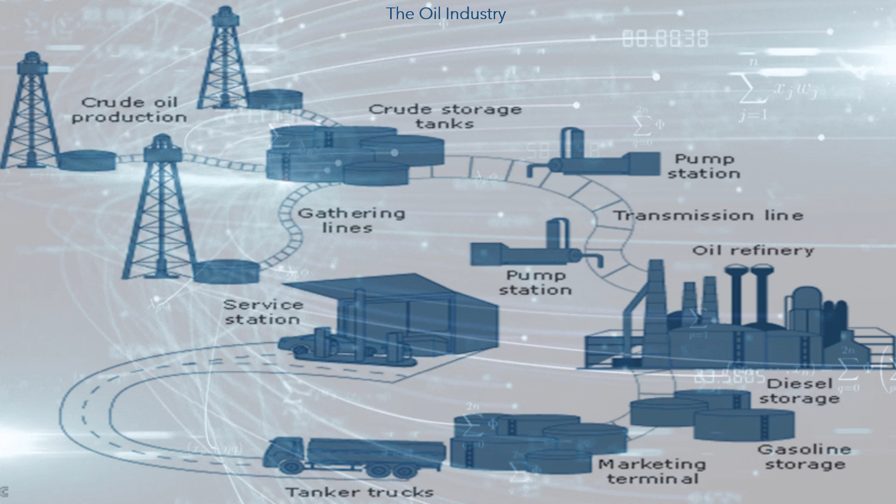Oil Supply Chain Optimization. The oil industry includes global processes of exploration, extraction, refining, transportation and marketing of petroleum products. The largest volume products in the industry are fuels, natural gas, fuel oil, and gasoline. However, petroleum is the raw material for many chemicals, including pharmaceuticals, solvents, fertilizers, pesticides and plastics.

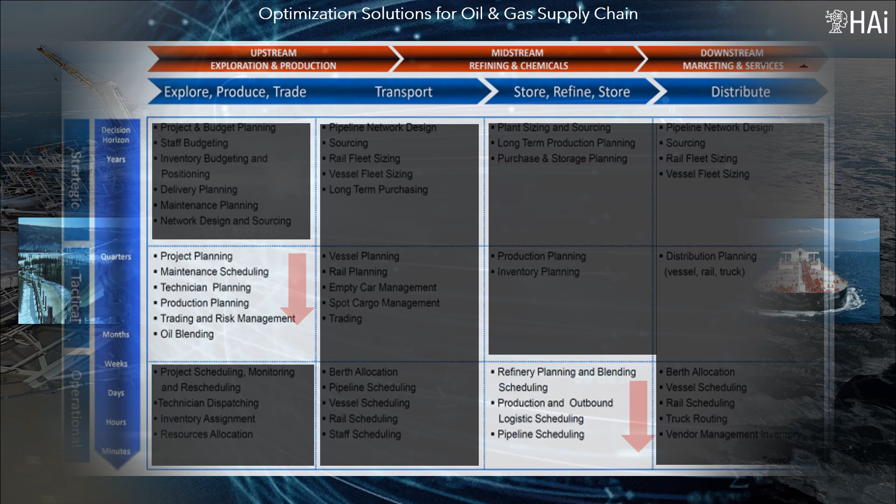The current computational power allows to model the supply chain in detail, considering individually all the systems that compose it. This allows to visualize all the existing bottlenecks that affect the maximization of economic gains. Optimization solutions in the transport chain of petroleum products can be classified by their hierarchy: strategic, tactical, and operational. Several of these applications will be discussed below.

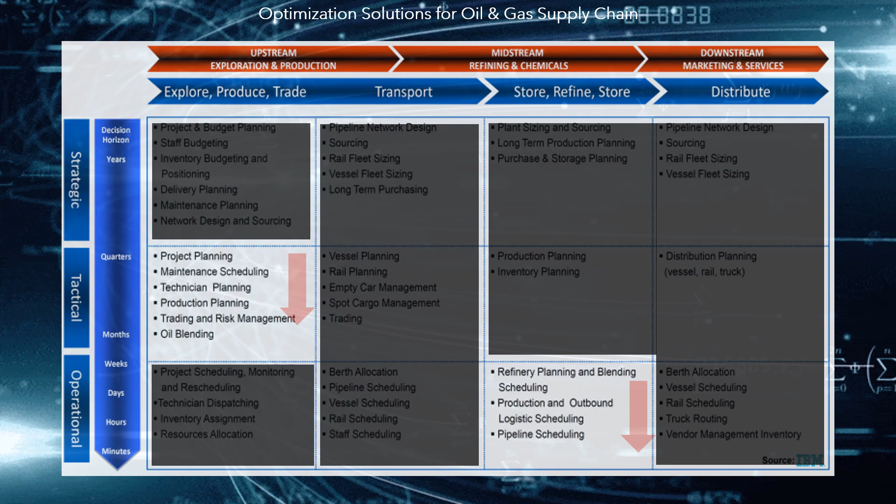The oil products mix for sale in the final markets. Optimizing the blend of crude oil and petroleum products is a multi-million-dollar application. It can be coupled to the production of oil fields, in such a way as to establish optimal plans for production, distribution, export and import. In addition, blending processes extend to petroleum products, for example, lubricants.

Oil transport, trading and blending optimization corresponds to a dynamic model that optimizes oil distribution between fields, refineries and ports, the oil mix for use in refineries, the mixture of oil for export in accordance with quality standards and established supply contracts, import of oil according to offers in the global spot oil market, and import/export of oil according to offers in the oil derivatives financial instruments.

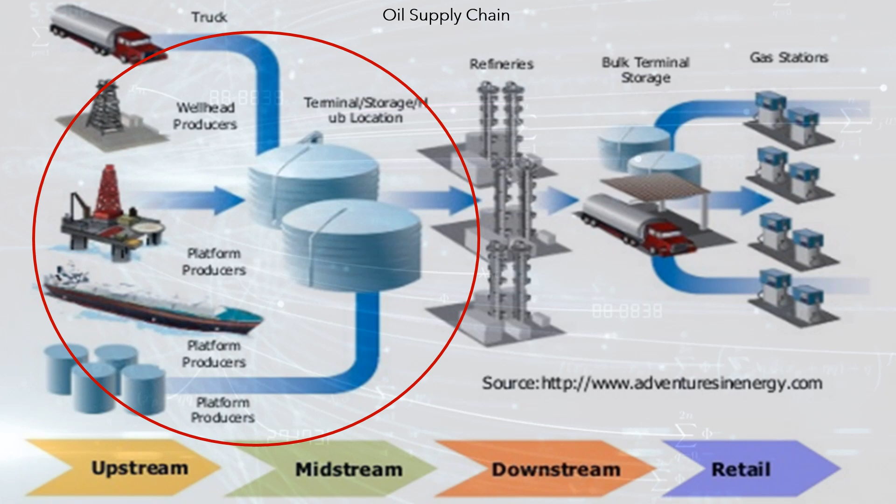The problem discussed in this section focuses on the distribution and blending of oil produced in the fields, to be distributed to the terminals of the oil facilities, where it will be delivered for use in refineries, own or in other markets. Refineries are modeled in an aggregate way, as an exogenous demand for oil. The blend model allows to plan transportation operations for multiple oil production systems, with a view to delivering crude oil blends to refineries and/or ports that are connected to the system. The system accepts any type of connectivity topology between facilities.

The supply of oil is given through fields producing different types of crude oil, with a predefined availability. This offer can be defined dynamically, considering the evolution of the oil-producing fields' operations plans. It is also possible to consider buying crude oil in the spot market. The demand for commercial crudes occurs in refineries and export ports. It is possible to buy crude oil in the spot market, in order to mix them and obtain new commercial oils. Purchases or sales of oil futures can also be considered, which must be respected.

The purpose of optimization is to determine the optimal operation of the system, in such a way as to maximize the utility produced, or to minimize the costs of satisfying a predefined demand. Integrally, the optimization process involves multiple crude oil blending processes, to make the optimal decisions related to the production, distribution, refining, consumption, and purchase and sale of oils over a planning horizon covering several periods.

Two alternatives of modeling may be considered: the direct formulation of the blending process that generates nonlinear equations for short-term planning, and an alternative formulation that maintains the model linear, in exchange for increasing its dimensionality over time, for long-term planning. The fundamental hypothesis of modeling is that all installations are connected to transfer tanks, in which the oil is received, mixed and dispatched to another terminal, or to an oil-producing or consuming facility.

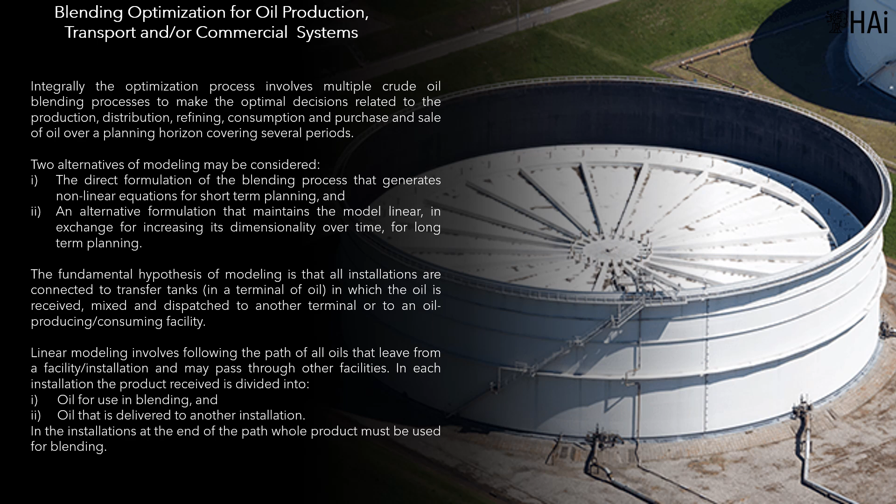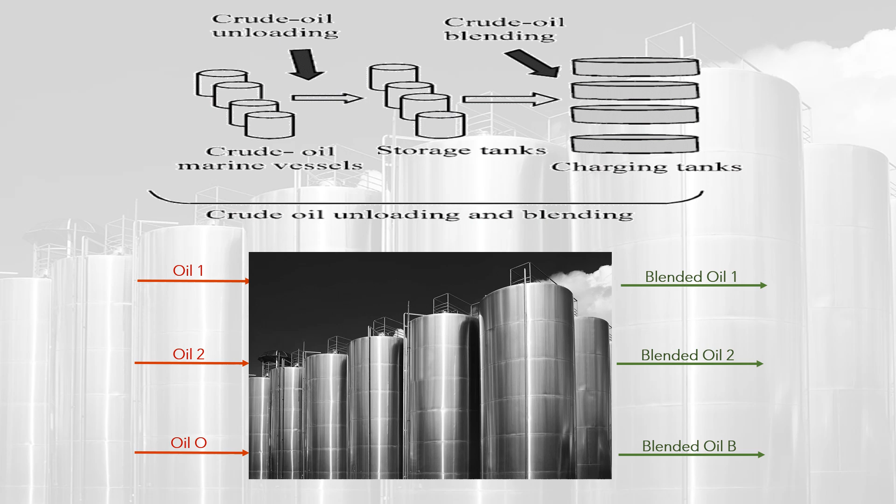Linear modeling involves following the path of all oils that leave from a facility and may pass through other facilities. In each installation, the product received is divided into oil for use in blending, and oil that is delivered to another installation. In the installations at the end of the path, the whole product must be used for blending, or for attending the demand. A terminal can be conceptualized as a machine that takes multiple oil crudes, mixes them, and produces multiple blended crudes. The diagram presents the flow of materials in the petroleum system.

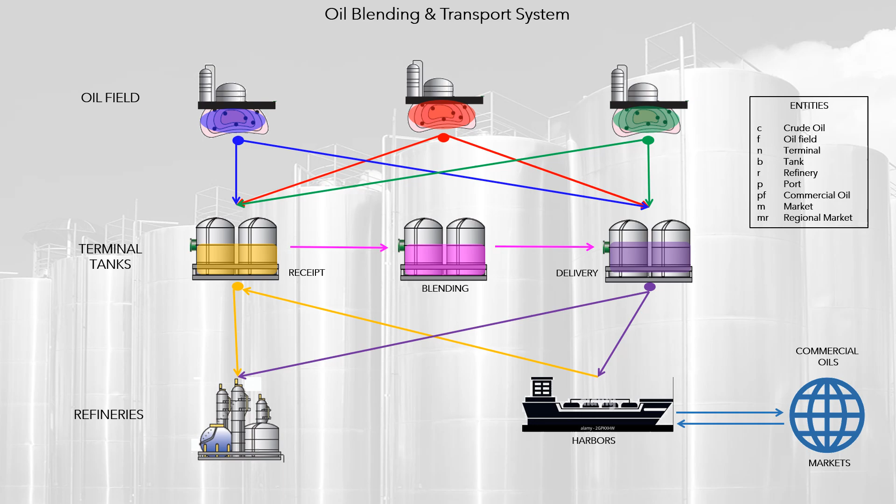The entities considered in the modeling are crude oil, oil field, oil terminal, tank, refinery, oil port, commercial oil, market, and regional market. Proof of concept: blending, transport, import, and export of crude oil. An example is the modeling of an integrated system of production, consumption, distribution, and purchase or sale of blending oil.

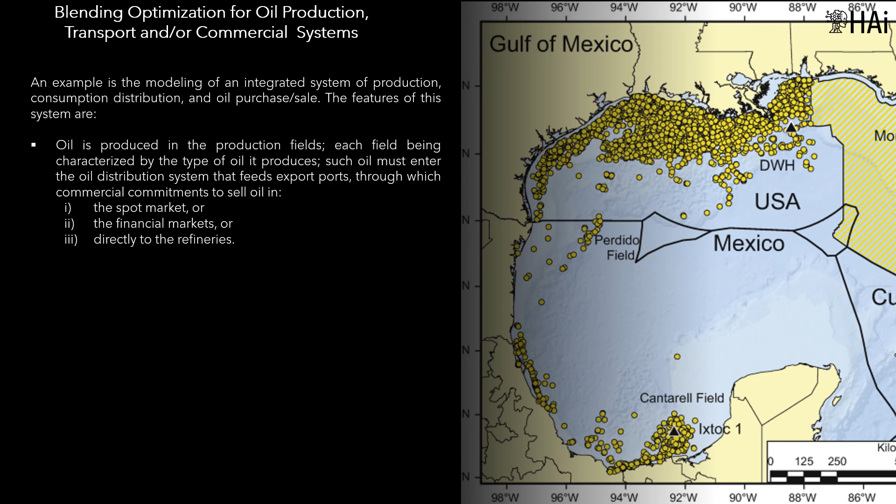The features of this system are: oil is produced in the production fields, each field being characterized by the type of oil it produces. Such oil must enter the oil distribution system that feeds export ports, through which commercial commitments to sell oil in the spot market, or the financial markets, or directly to the refineries.

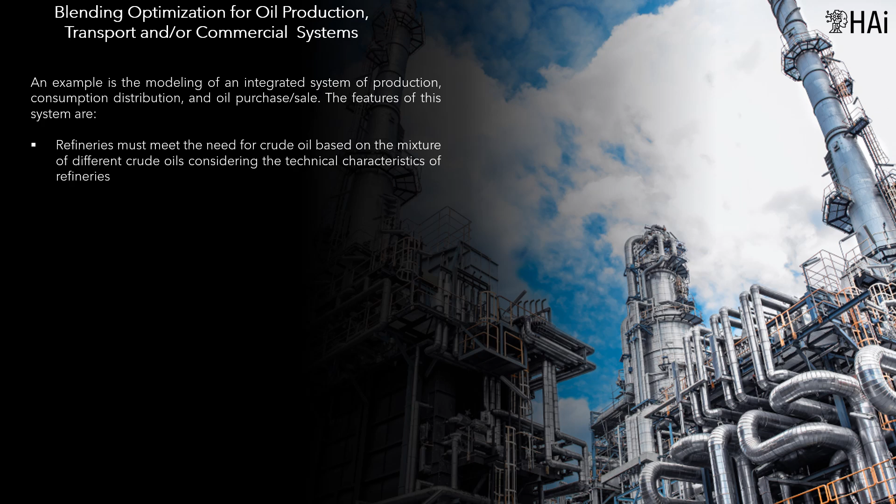Refineries must meet the need for crude oil based on the mixture of different crude oils, considering the technical characteristics of refineries. At export ports, oil must be dispatched to meet commercial commitments to sell oil. Associated with each sales contract are the physical chemical characteristics that must satisfy the oil delivered.

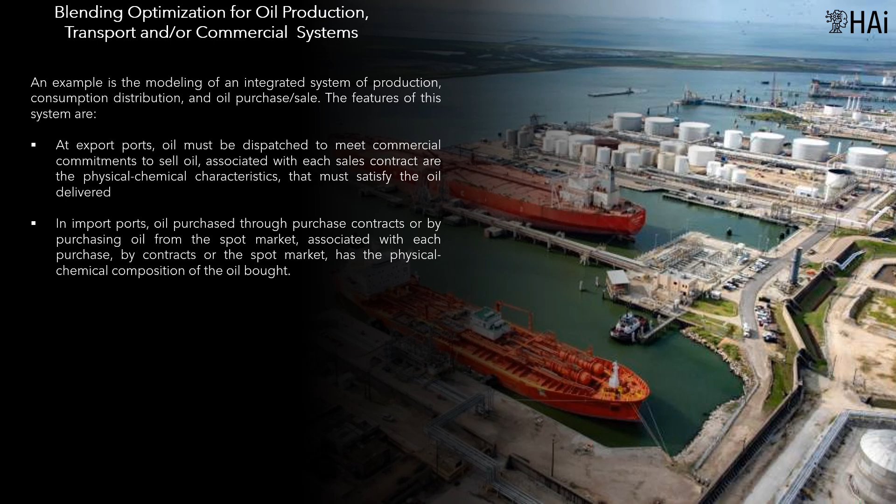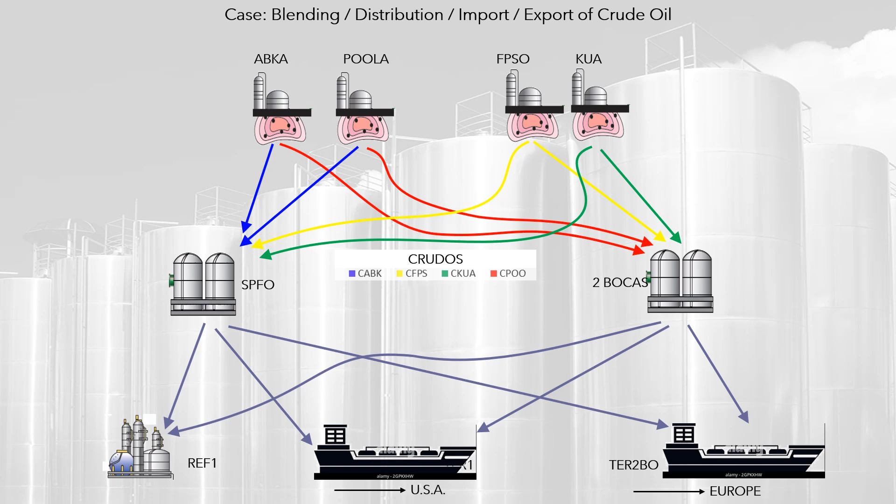In import ports, oil is purchased through purchase contracts or from the spot market; associated with each purchase, by contracts or the spot market, is the physical chemical composition of the oil bought. This very simple case considers 4 oil fields, 2 terminals of oil blending, 1 refinery, and 2 export ports, 1 to USA and 1 to Europe.

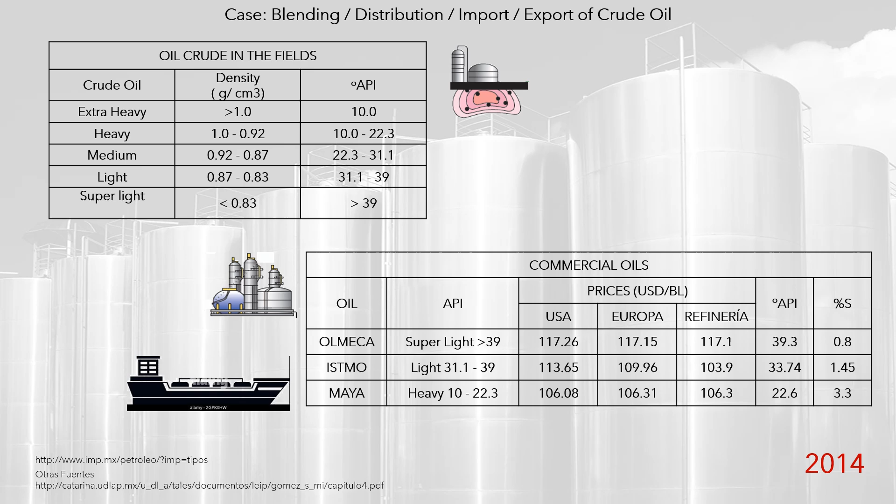The tables present the characteristics of the oils included in the modeling. The crudes produced in the fields have no commercial characteristics, are of many types, and their characteristics can vary throughout the planning horizon. Commercial crudes are standardized and are those that are traded in the oil markets.

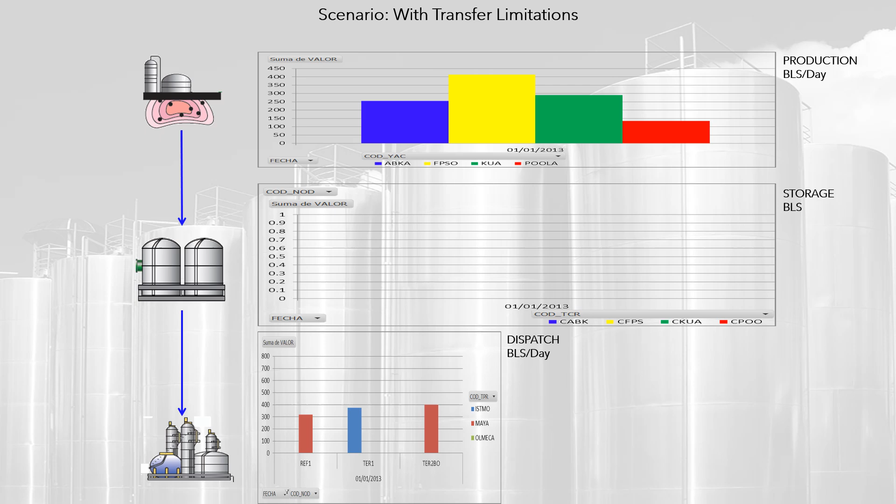In real-life industrial processes it is necessary to model chain blending processes. While a single blending process may be modeled linearly, by chaining multiple blending decisions the problem is complicated since it is not known a priori the characteristics of the physical chemical composition of the material resulting from a blending process that ends up being input of another blending process.

This chaining of blending processes can occur in space, between multiple industrial installations, and over time, when the final stock of mixed products over a period becomes part of the initial inventory of the mixed product that is stored in an industrial facility to meet commitments in the future. The chained resulting problem gives rise to a nonlinear optimization problem.

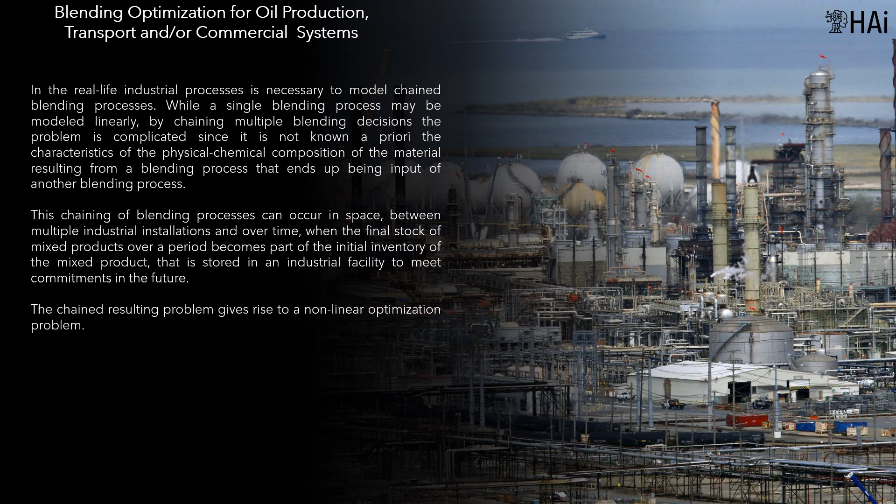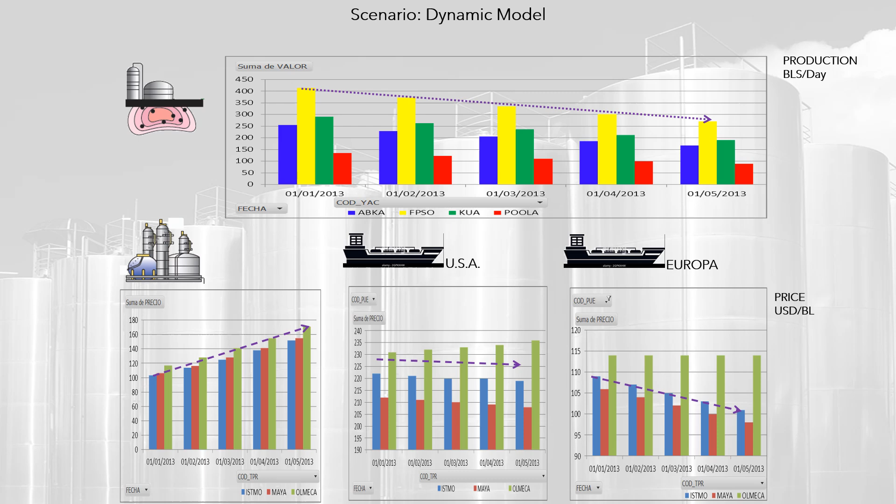Next, a dynamic scenario is presented, in which the 5-month dispatch is simulated. The image presents the production of aggregate oil, and the prices of commercial oils in the different markets. The image presents the results of the moderate transfer limitations scenario. It can be noticed how the storage tanks are activated, and how the availability of oil is exhausted for the last period, because the oil in the tanks is not valued at the end of the planning horizon.

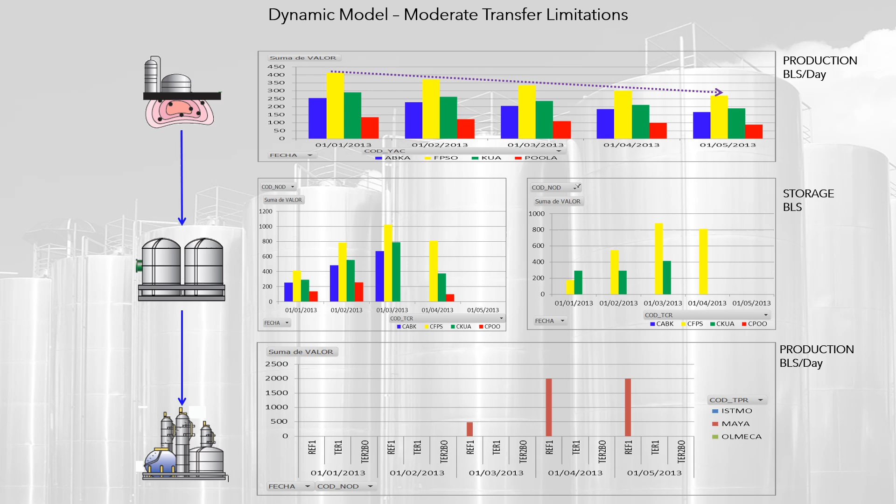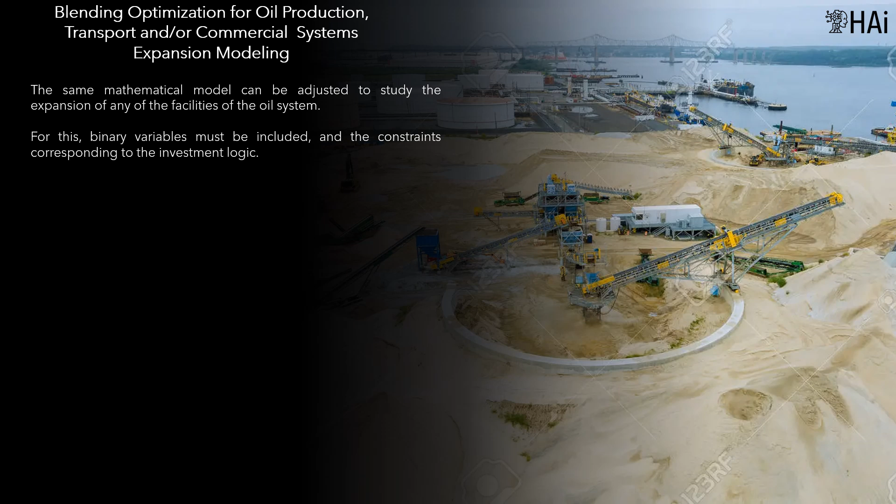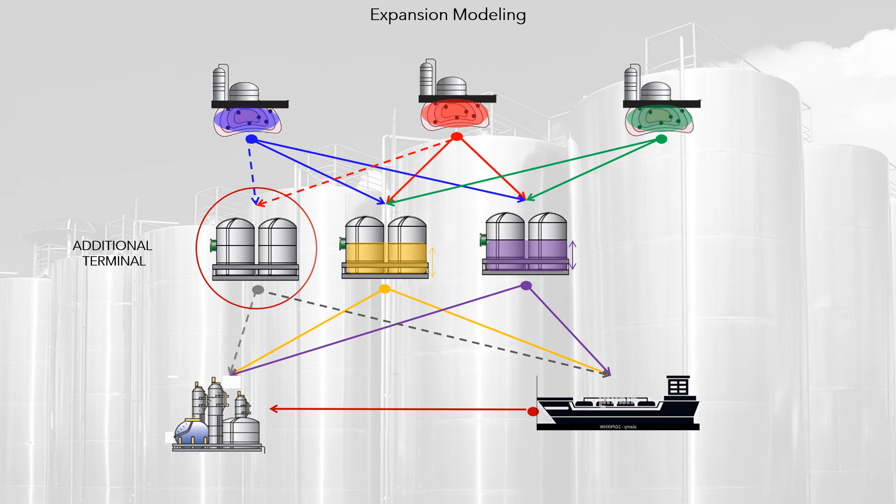The case of expansion modeling is based on the previously used system. The possibility of building another oil blending terminal is considered. Since the expansion problem of an oil system corresponds to a strategic decision with long-term impact, the mathematical modeling indicated is stochastic optimization based on scenarios.

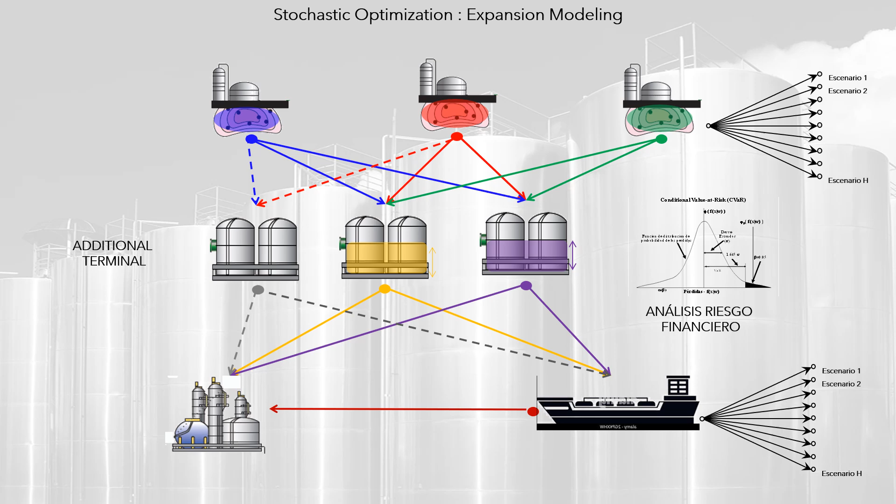In this case, at least two sources of uncertainty can be considered. First, the volume of oil that can be extracted from oil fields, when and how much. Secondly, the price and demand for crude oil in the final markets. Finally, when using stochastic optimization, it is convenient to include the analysis of financial risk to protect investments. This can be done by controlling risk indicators such as conditional value at risk.

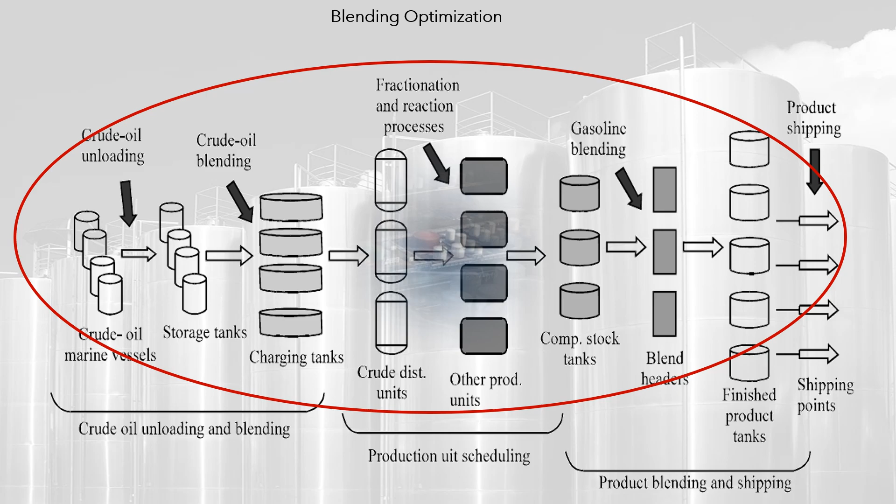Integrating crude supply, blending and product distribution models in refinery planning. Integrated optimization of the entire oil blending chain implies a holistic model of the problem. This vision produces greater economic gains than its piecemeal modeling. Crude oil blend optimization scheduling. This case is based on the paper.

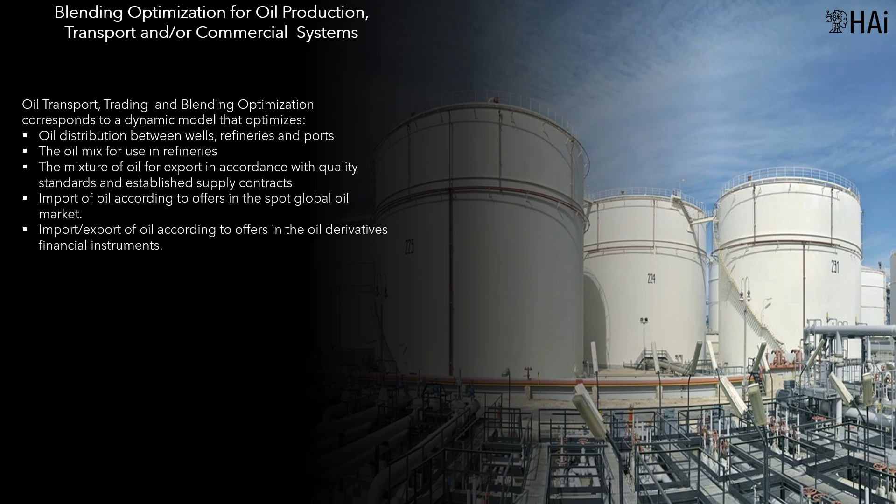Crude oil blend scheduling optimization is an application with multi-million-dollar benefits. It can be coupled to the production of oil fields, in such a way as to establish optimal plans for production, distribution, export and import. In addition, blending processes extend to petroleum products, for example, lubricants.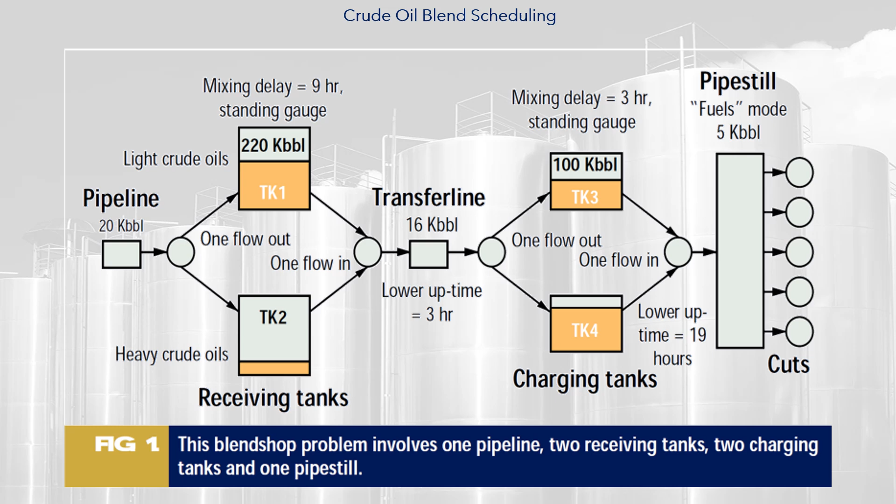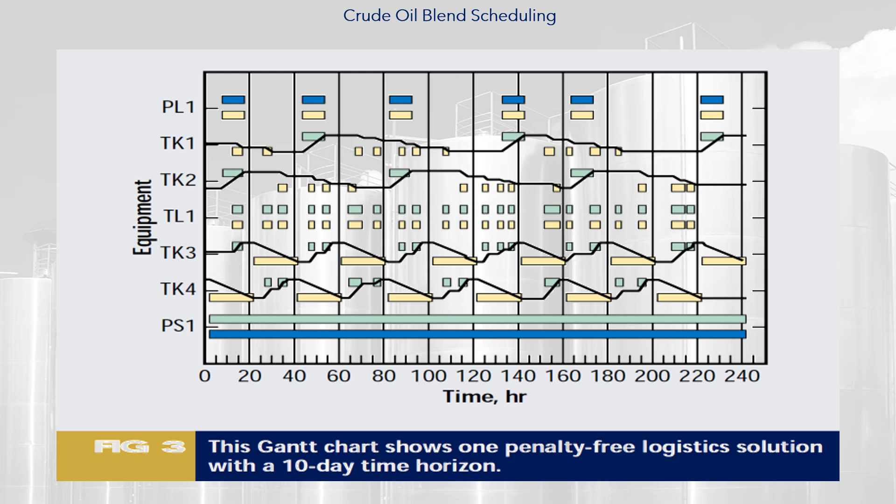Reducing quality target variance should be at the top of the list for refinery improvements. Deviations from quality targets should be minimized, to charge the pipe still with a steady mixture of crude oil. Steadier quality crude oil mixtures charging the pipe stills will also translate into steadier operations for downstream production units. It also makes good sense to run pipe stills with a constant flow rate for as long as possible. An example of an improved quality target, or key planning proxy, is shown in the figure.

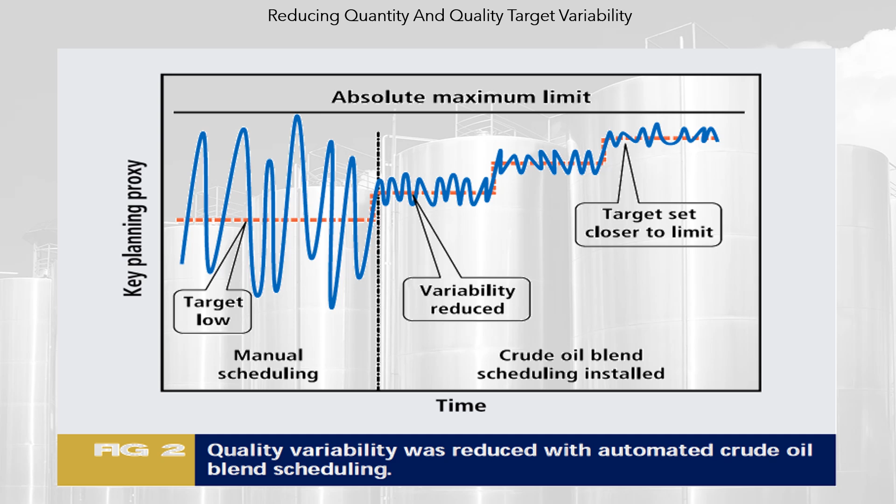Hypothetical benefit calculations. Total yearly savings in American dollars: quality target variability improvements such as whole crude oil sulfur, 2 million; reduced chemical injection, 100,000; distressed sale of crude oils from the refinery, 325,000; pipeline penalty charge for changes in sequence or timing, 75,000; spot opportunity for crude oil trades, 250,000; and reduced working capital, 100,000.

Total year: 2,850,000. These hypothetical benefit calculations translate into over $2.5 million worth of the potential refinery profit that would not have been achieved with manual scheduling alone. It must be emphasized that this number only provides a benchmark or yardstick to Pareto, at least qualitatively, the priorities.

In terms of choosing between other possible and competing capital investment projects at the refinery. From the perspective of overall crude oil costs of the refinery over 1 year, this $2.85 million in savings is less than 0.41% of the total feedstock cost.

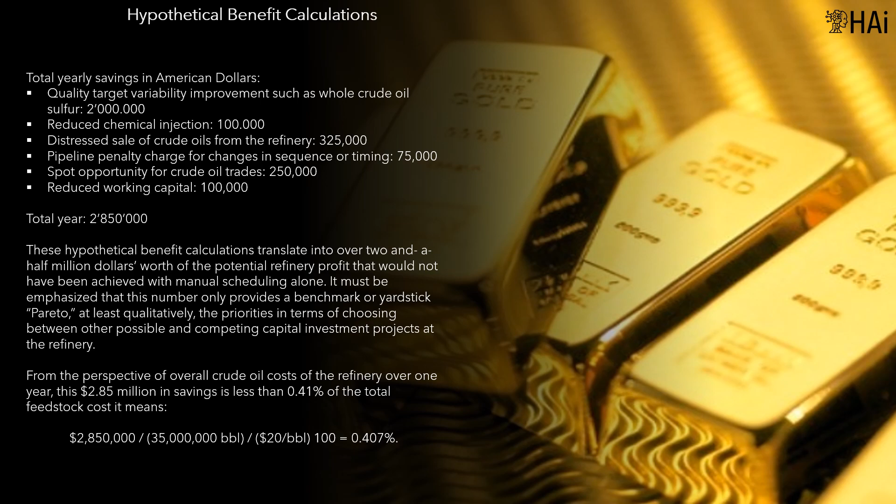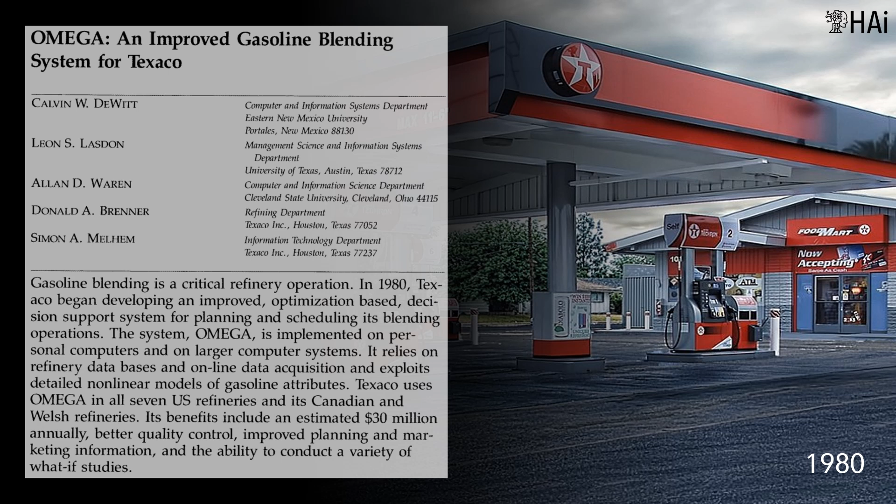Success case: Omega, an improved gasoline blending system for Texaco. This case is based on the paper 'Omega, an improved gasoline blending system for Texaco,' published at Interfaces.

Oil lubricant blending, a nonlinear optimization problem. Industrial lubricating oil is a liquid or semi-solid lubricant used in various types of automobiles and mechanical equipment to reduce friction and protect machinery and machine parts. It mainly plays the roles of lubrication, auxiliary cooling, rust prevention, cleaning, sealing, and cushioning.

At present, the demand for lubricating oil shows a trend of specialization and customization. Different mechanical equipment and applications have different requirements for lubricating oil performance, so there is an urgent need for enterprises to produce specific quality lubricating oil according to the actual demand.

Lubricating oil products are prepared by mixing two or more base oils with different properties according to a certain proportion. However, the varieties of base oils refined by oil refining enterprises are limited, so it is necessary to use limited base oils to prepare the required lubricating oils. Therefore, the blending of base oils is the basis for the preparation of lubricating oil products. The most common method of lubricating oil blending is tank blending.

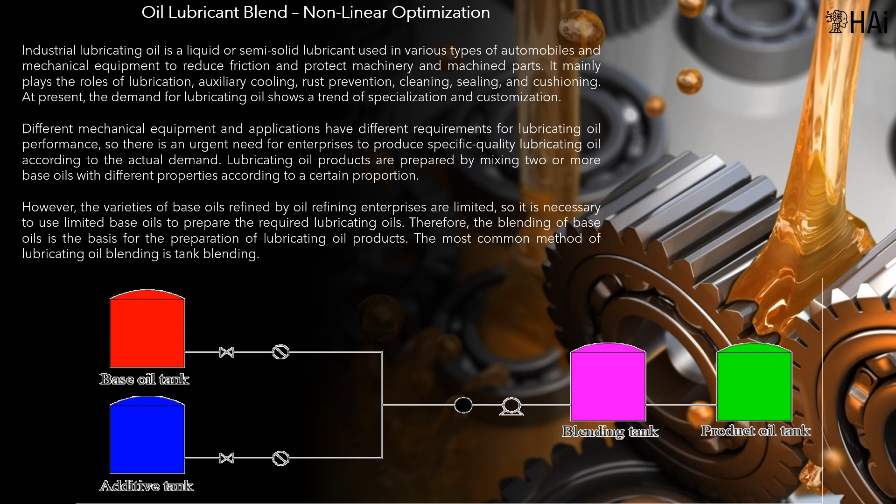The physical and chemical properties of oil products change when they are blended. The linear or nonlinear relationship between this change and the properties of each blending component is expressed as an additive effect between the components. A certain physical and chemical property equal to the superposition of each component according to its composition ratio is called linear harmony, otherwise, it is called nonlinear harmony.

The chemical composition of oil products and additives is very complex, and their physical and chemical properties generally do not have an additive effect, so the blending of lubricating oil is mostly nonlinear.

The performance indexes of lubricating oil mainly include viscosity, freezing point, acid value, flash point, oxidation stability, residual carbon, and so on. Therefore, the optimization of the design of a lubricating oil blending scheme mainly includes two aspects: to select the base oils reasonably to meet the performance index requirements of the blended product, and to establish the blending mathematical model and determine the blending scheme of each base oil, on the premise of meeting the product performance indexes.

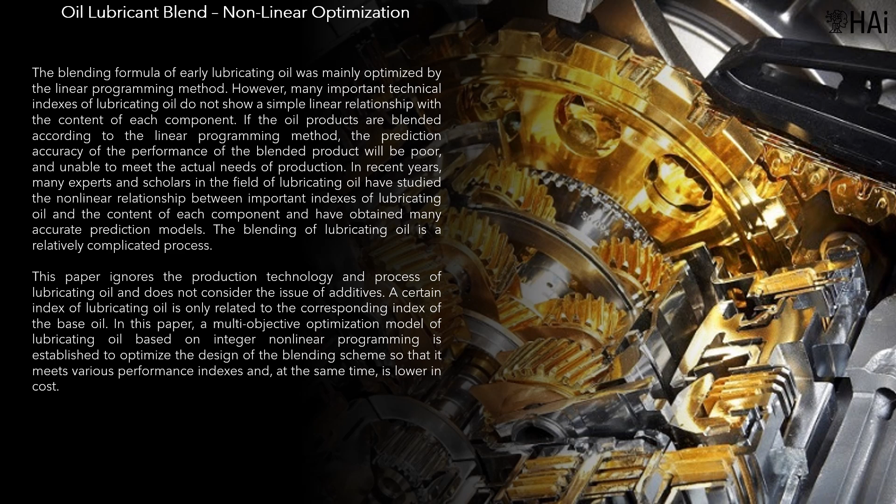The blending formula of early lubricating oil was mainly optimized by the linear programming method. However, many important technical indexes of lubricating oil do not show a simple linear relationship with the content of each component. If the oil products are blended according to the linear programming method, the prediction accuracy of the performance of the blended product will be poor, and unable to meet the actual needs of production.

The nonlinear programming method can manage the nonlinear relationship between important indexes of lubricating oil and the content of each component, and has obtained many accurate prediction models. However, the blending of lubricating oil is a relatively complicated process.

The next model ignores the production technology and the process of lubricating oil, and does not consider the issue of additives. Considering that a certain index of lubricating oil is only related to the corresponding index of the base oil, it is necessary to optimize the design of the blending scheme, so that it meets various performance indexes and, at the same time, is lower in cost.

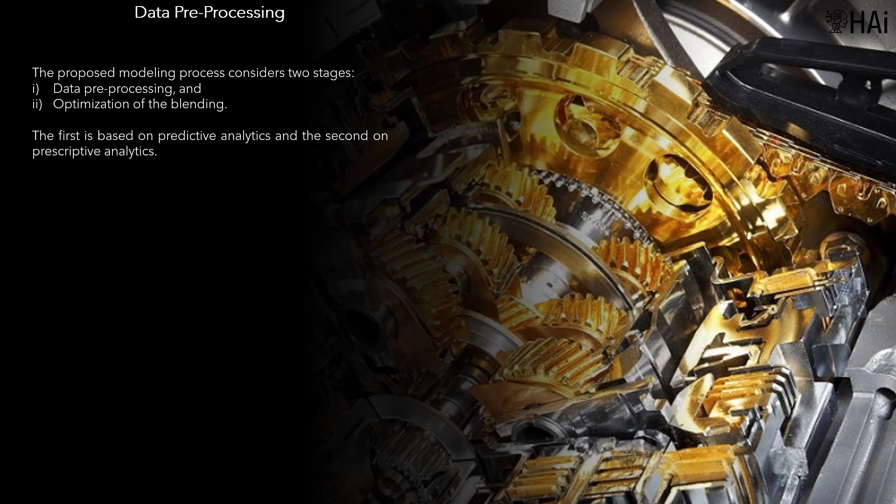In this paper, a multi-objective optimization model of lubricating oil, based on integer nonlinear programming, is presented. The proposed modeling process considers two stages: first, data preprocessing, and second, optimization of the blending. The first is based on predictive analytics and the second on prescriptive analytics.